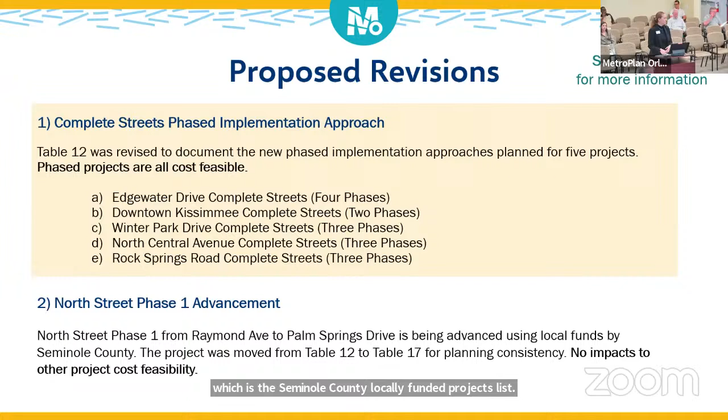Then item 3 is a little bit of touting for City of Orlando. They did receive a Safe Streets and Roads for All federal discretionary grant not too long ago. So we are incorporating that into our MTP by reference, and that's what you'll see on Table 13, which is our bicycle and pedestrian needs list. With this addition, there are no impacts to any project cost feasibility because that is a separate funding source.

Item 4 is the addition of the Headwaters Trail from south of Nova Road to State Road 528. This is a request from Osceola County staff to add this project to Table 13, our bicycle and pedestrian needs list, at the very bottom of the list as an unfunded need, because they are pursuing some other potential funding sources to be able to move forward with that trail. They were looking for planning consistency to be able to unlock the opportunities for those other funding sources. So while that's being added to our list as an unfunded need in the 2045 MTP, that means there are no impacts to other project cost feasibility.

Item 5: earlier this year, we made some revisions to some of our bicycle and pedestrian projects to specifically call out their potential eligibility for SUNTrail program funds. We're adding that description to one other trail we missed in those prior edits, the St. Andrews Trail project in the city of Winter Park. We're just changing that description to say it's potentially eligible for SUNTrail program funding. With that minor administrative change, there are no impacts to project cost feasibility.

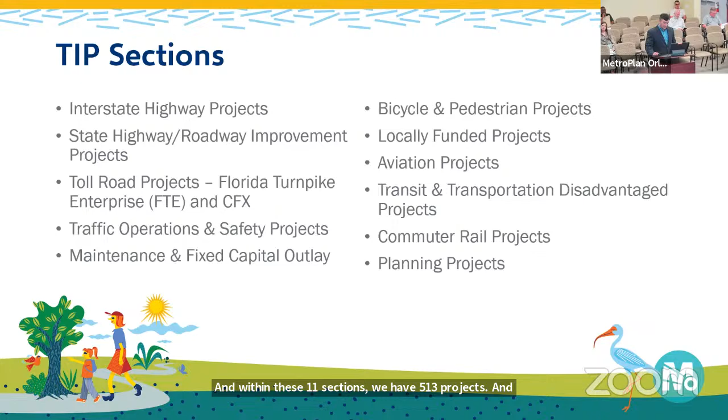I'll start with the National Highway System. This section of the TIP includes projects on the Interstate Highway System, Strategic Intermodal System, and National Highway Freight Network. For our region, most of these projects are on I-4. Within the TIP, we have 19 projects with $1.9 billion in funding, and a few we'd like to highlight.

First, we have one of the Moving Florida Forward projects that will add additional lanes in Osceola County from west of State Road 532 to east of County Road 522. Next, in Orange County, we have a project adding lanes from east of State Road 522 to west of State Road 528.

Also in Orange County, we have an interchange improvement project, that's at Daryl Carter and I-4. And finally, in Seminole County, we have a project adding lanes on I-4 from 1 mile east of State Road 434 to east of US 17-92.

Next, we have the State Highway System of the TIP. This includes capacity improvements, complete streets, safety operations, and ITS investments on the State Highway System. Within the TIP, we have 68 projects with $844 million in funding.

A few projects we'd like to highlight: in the eastern part of Orange County, a project that will add lanes and rehab the pavement on State Road 50 from Chuluota Road to State Road 520. We also have, in the Kissimmee area, an intersection improvement project at John Young Parkway and Pleasant Hill Road.

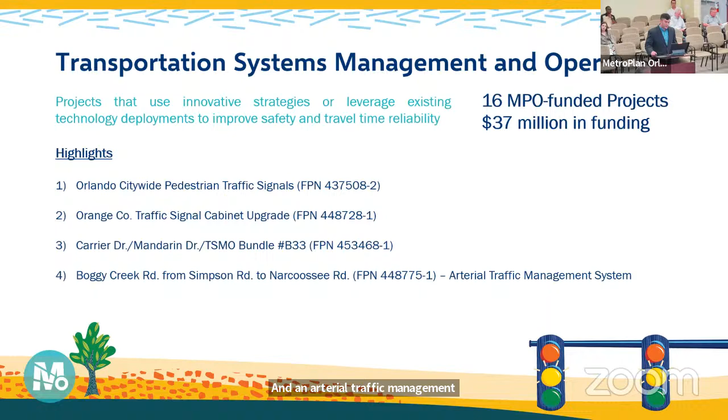Next, we have the bicycle and pedestrian section of the TIP. This includes standalone bicycle and pedestrian improvement projects, including sidewalks and trails. Within the TIP, we have 25 MPO or Metro Plan Orlando funded projects, with $52 million in funding.

In Pine Hills, we have the Pine Hills Trail Phase 2 from Bonnie Brae Circle to Clarcona Ocoee Road. In the Baldwin Park, East Orlando, East Orange County section, we have the Little Econ Trail Phase 3 from Baldwin Park Street to Richard Crotty Parkway.

And then we have several Shingle Creek trails. In Orange County, the Kirkman Trail section from Old Winter Garden Road to Raleigh Street. In Kissimmee, Phase 2B, the Yates Connector. Also in Kissimmee, the County Line Connector, Phase 2C. And finally, in Orange County, Phase 4, from Alhambra Drive to Old Winter Garden Road.

Safe Routes to School. This includes sidewalk projects within close proximity of schools. Within the TIP, we have 3 projects with $1.1 million in funding.

These 3 projects are the Deerwood Elementary Phase 2 sidewalk gaps in Kissimmee; Phase 1 of the Hickory Tree Elementary School sidewalks in St. Cloud; and Phase 2 of the Boggy Creek Elementary and Parkway Middle School sidewalk gaps, also in Kissimmee.

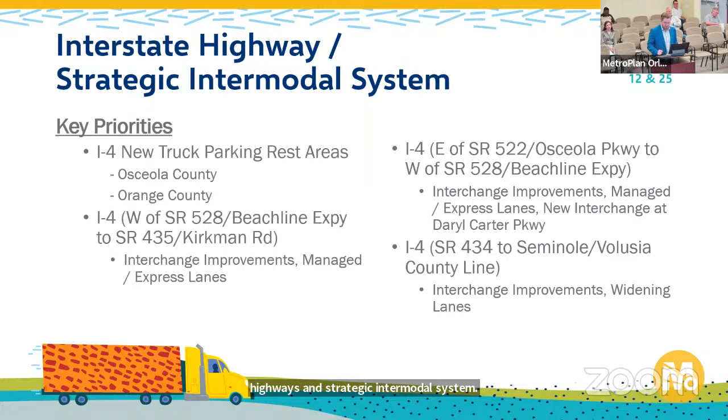Here is a list of the funding programs within the PPL. Each of these has a prioritized project list for that category, as well as an informational one-sheet within the document explaining the ins and outs of those programs. I'll give a brief overview starting now. First, the Interstate Highways and Strategic Intermodal System—the one-sheet for this program is on page 12 and the full list on page 25.

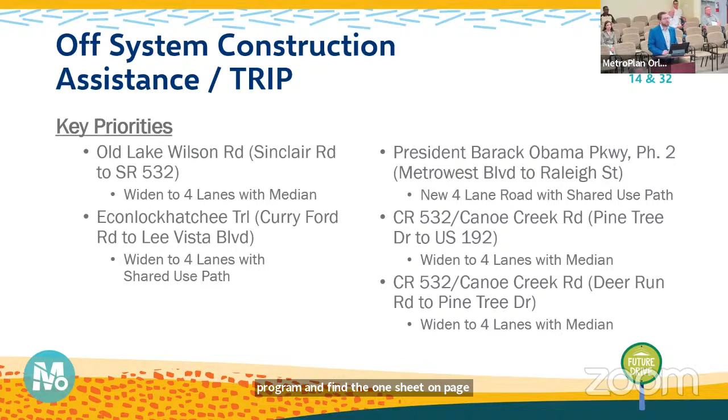Next, we have the State Roads and State Highway System—one-sheet on page 13, full list on page 26. Next, our Off-System Construction Assistance Program—one-sheet on page 14, full list on page 32. Next, our Complete Streets Program—information on page 15, full list on page 33.

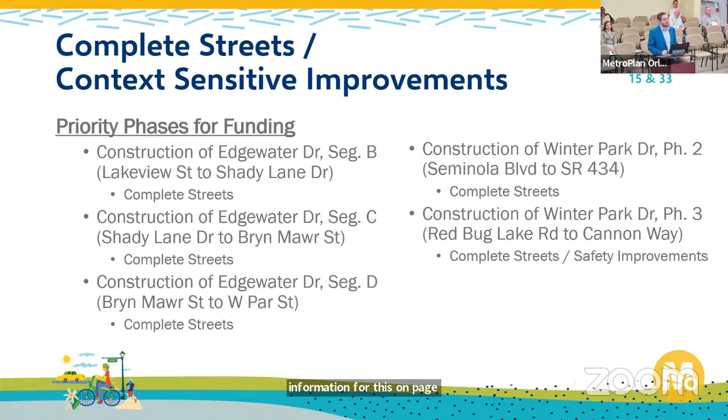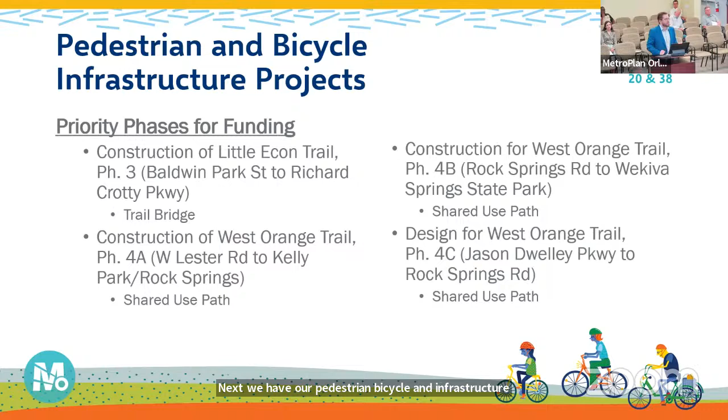Next, we have TSMO, which I'm pretty sure you're all fairly familiar with—more information on page 17, full list on page 35. Next, our pedestrian, bicycle, and infrastructure projects—information on page 20, full list on page 38. Safe Routes to School—more on page 21, full list on page 40. Our critical sidewalk gap bundles are on page 22, with the full list of broken out bundles on page 41. And our regional transit projects, to round out the lists, are on page 23 with the full list on page 50.

I know I kind of raced through all of those—that was kind of my intention, hoping you guys can go in and take a look, a quick breeze through. Hopefully you didn't have a chance to read all the information on those slides, so you can take a look at the plan itself and give us some good feedback. I know Dr. Brock has already given us some good information during Taylor's presentation, so we've got an edit in already.

If you could, please get that feedback into us by June 7th. As you're reading the document, think: is this a priority phase that we are prepared to undertake? Is this consistent with our commission's, our city council's priorities still? Have all of the departments that would be affected weighed in on the project?

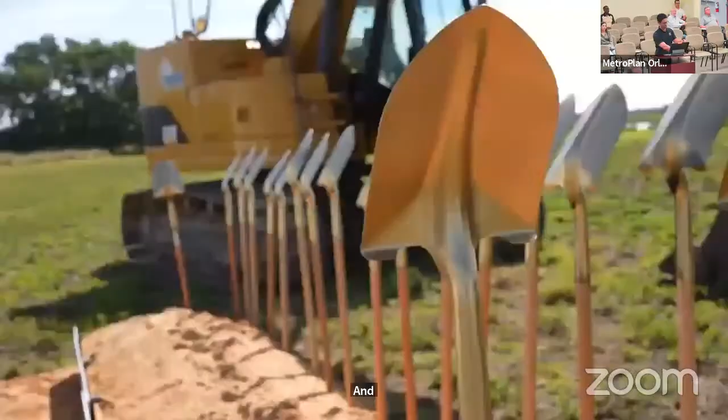It's an amazing day anytime we can create a new corridor in Central Florida, and 516 is going to serve as a vital connection between Lake and Orange County. I really am hopeful that this roadway will set a standard for us to look and think outside the box of how we can incorporate a sense of place.

Success for the Florida Wildlife Corridor movement depends on these diverse partnerships, from agencies like CFX and county planners and developers and NGOs and passionate individuals like yourselves. If we're going to chart a path for Florida that we can be proud of for our future, we have to do these kinds of collaborations. This new road is a pioneering example of how roads can be planned and designed sustainably with less impact on our ecosystems and with more applications of transportation technology.

So imagine never having to worry about where and when to charge your EV, which is what most of us do today if we own them, but instead just driving down the road that recharges as your vehicle moves. Yeah, we're gonna learn so many things.

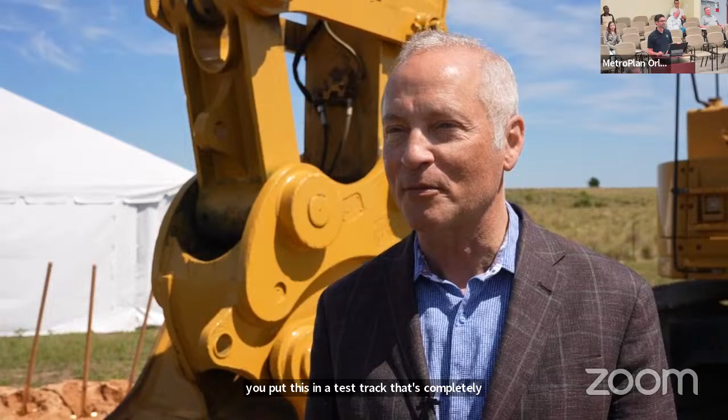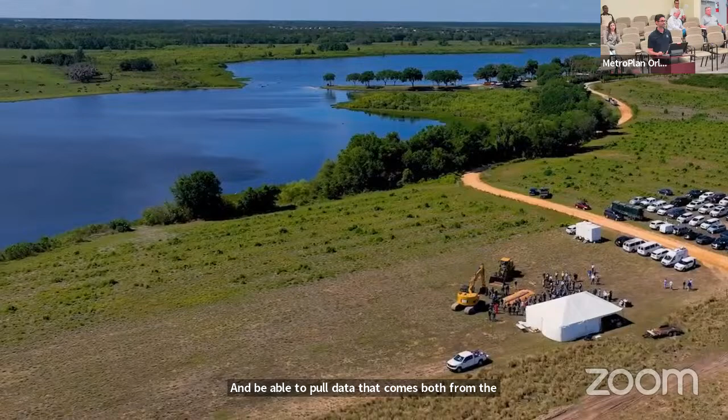As you know, when you put this in a test track, it's completely different to when you get it out in the real world. So we're gonna learn things like feedback from the drivers. We're gonna learn about the excitement that people have about the fact that this is not just a science experiment, that it's a real world deployment and that it actually works. And be able to pull data that comes both from the roadway and the cloud and show everybody that this is actually a sustainable, scalable solution.

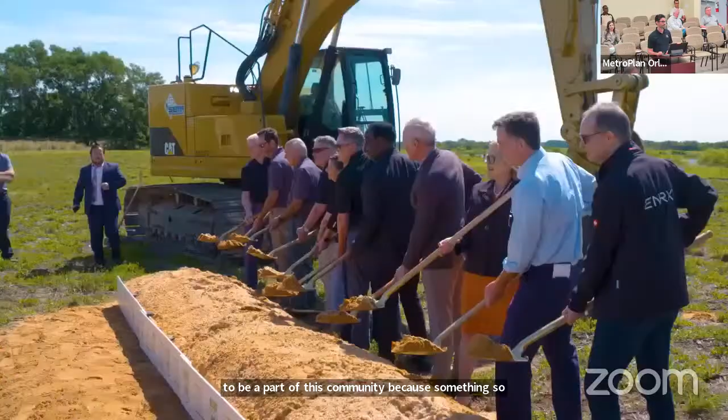You know what I'm excited about is the protection of the wildlife corridor. I'm also very excited about this new technology. And it's just, I'm proud. I'm proud to be a part of this community because something so innovative, so cutting edge is starting right here in Central Florida, and I think we're thinking forward, we're thinking about the next generation.

So now you didn't see me in the video, but I promise you I was there. A lot of excitement and positive energy around the project.

So jumping into the project details, State Route 516 is an east-west connection between State Route 429 in Orange County and US 27 in Lake County. It's a project that's been studied for over 20 years now. The Lake Orange Expressway is a new 5-mile limited access expressway, and it was designed in 3 segments, 2 of those in Lake County, 1 in Orange County.

Segment 1 extends from US 27 to Cook Road, and that was designed by HDR. Segment 2 extends from Cook Road to the Orange County line, and is being designed by BCC Engineering. And segment 3 continues east from the county line to State Road 429 and is being designed by DRMP.

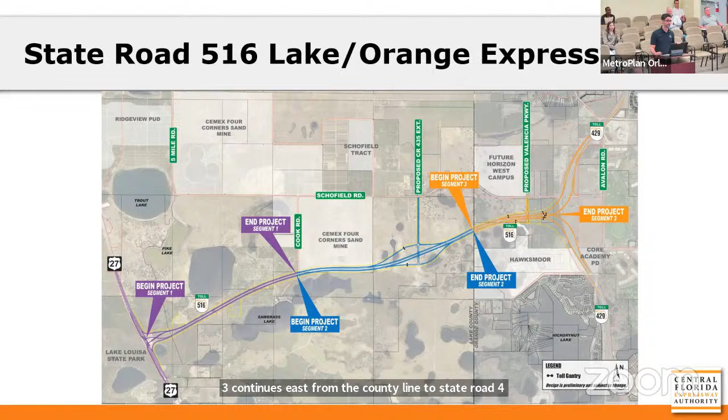In the spirit of the Wellness Way area plan, our board member, Commissioner Sean Parks, challenged the staff to think big and incorporate sustainability elements during the design phase of the State Route 516 project. Really, to meet that challenge, as you can see here, we've incorporated a number of key elements.

First, we've coordinated extensively with the Florida Wildlife Corridor Foundation, FDOT, and Lake Louisa State Park to site a wildlife crossing under US 27. The proposed crossing will open a critical connection through the constrained area of the Florida Wildlife Corridor, northwesterly toward the Green Swamp and the Ocala National Forest.

The project also includes the installation of solar arrays throughout the corridor with the intent of offsetting 100% of our power consumption from our lighting, our toll systems, and our ITS systems that we're going to be deploying on the 516 corridor.

We're also partnering with Lake County to include a co-located public trail, which extends approximately 3 miles from US 27 to County Road 455. And then following construction, we're going to be landscaping the trail and roadway, which will include drought tolerant native plantings with a heavy focus on pollinators.

And as a part of the overall project, we are pursuing a platinum level Envision certification. So to achieve a certification from the Envision is similar to achieving a platinum level LEED certification on a building project.

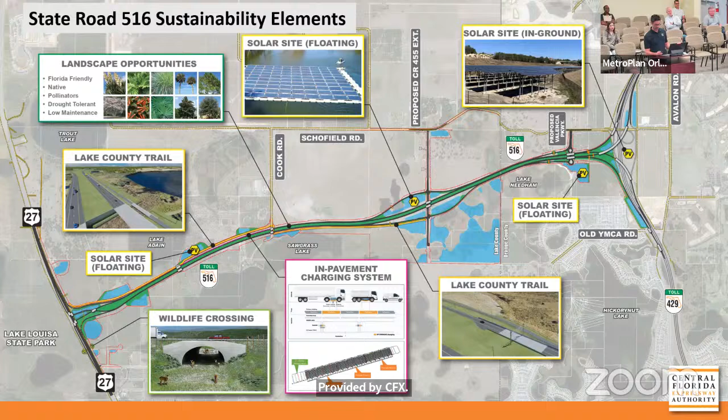All right, so here we are. Let's jump into the dynamic wireless charging. The next few slides will focus on this technology and this section of roadway, which is segment 1. It's going to be approximately a 1/2 mile to 3/4 mile section of road, one lane in the westbound direction, starting around Cook Road.

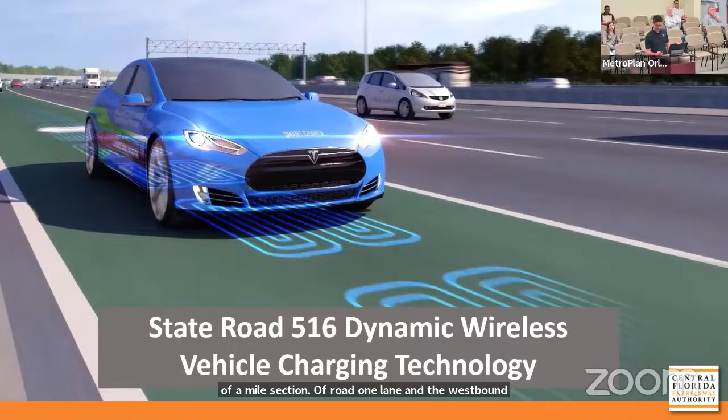The pilot team's key partner for the initiative is Aspire, a National Science Foundation Engineering Research Center. Aspire stands for Advancing Sustainability Through Powered Infrastructure for Roadway Electrification. Aspire has set a goal to progress the field of sustainable and electrified transportation in all its forms to the point where people everywhere can benefit from transportation innovations without ever having to think about where or how their charging is happening. Aspire has 400 collaborators from 10 partner universities and dozens of disciplines. They integrate academia, scientific research, and real-world applications, working in sync with over 60 industry, government, and nonprofit members across all sections of the electric transportation ecosystem.

We've also engaged with ENRX as a technology provider for the wireless charging system. ENRX is a global green tech company based in Norway, and they're going to deliver that technology solution on our roads. They have active projects in both Belgium and Germany using wireless charging technologies.

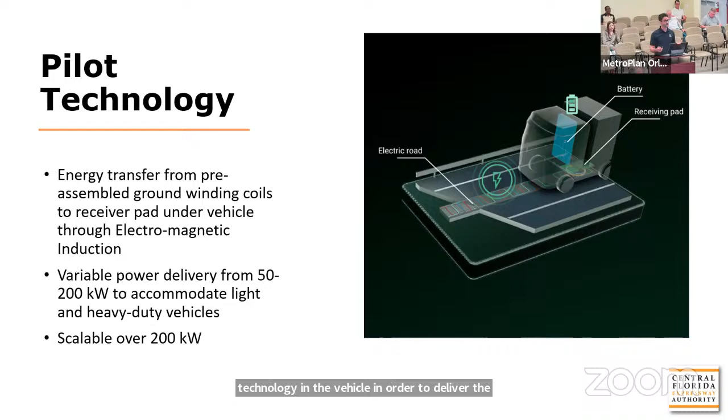Jumping into the technology employed for the roadway, we're actually going to be using the laws of electromagnetic induction for this application. A current is sent through coils located in the pavement, which creates an electromagnetic field. A receiving pad is required on the vehicle in order to generate charge to the electric vehicle. The system is dynamic in nature, and will create the appropriate level of charge for the size vehicle. Smaller vehicles can receive a 50 kilowatt charge, and larger truck traffic can receive a 200 kilowatt charge. The technology in the roadway will communicate with the technology in the vehicle in order to deliver the charge at highway speeds, which is a key component of the project.

The CFX design team has been working with engineers and scientists at NREX and Aspire for the past year and a half to identify and develop the construction means for incorporating the charging system into the constructed roadway. In September, CFX hosted a team of international engineers and scientists at our headquarters building to review the first prototype of the precast concrete panels that will ultimately house the technical components of the wireless charging system within the roadway. Team members attended from as far as Germany and Poland to review the concrete precast panel prototype.

So why is this test important? Literally and figuratively, we're laying the groundwork for this new innovative technology, and standardization is a key and important part. International standards must be developed to inform utility providers and auto manufacturers on how to move forward with technology decisions in their respective businesses. Pilot studies such as ours are critical to developing such standards, and if successful, will ultimately lead to the widespread implementation of in-road dynamic wireless charging.

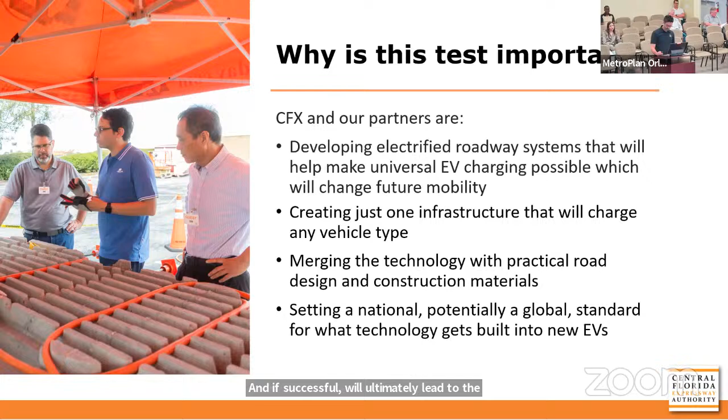Taking a step back, looking at the concrete form, it was important to establish that the precast panel could be fabricated locally using conventional construction methods and materials while retaining the detail and tolerances established in the design. NREX shipped samples of their technology elements to be placed in the panels ahead of the meeting at CFX. When the team convened in September, we had 2 sections of the precast concrete panel prototypes on site. Each panel is 11 feet long, 3.5 feet wide, and weighed more than 5,000 pounds. The technology elements shipped from Poland were laid out and installed within the panels to check the constructability and the fit, and everything fit better than expected. The test went very well back in September.

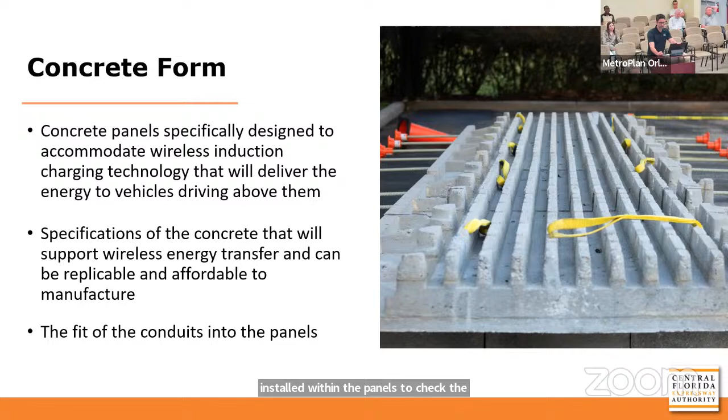And that's all I have, but happy to answer any questions. Excellent presentation, we'll go ahead with questions. Charlie.

So just curious, you said the charging lane is like a half mile to 3/4 of a mile? That's right. So is there an estimate, like a full charge for a vehicle or partial? Yeah, so there is an idea. In general, what we're targeting is that the charge should be able to get the vehicle through that corridor without losing any battery power, and then give it enough to basically double that length. So it's not intended that once you go over the location, you're fully charged.

This is more of a prototype application, really for setting the standards for future use. For this type of technology to be helpful and useful, it needs to be implemented in longer segments and sections of roadway. There's a test track out in Utah where they have actual buses with the charging capability, and they can run perpetually around those tracks. But again, there's a good segment of that track that has the charging infrastructure. That gives an idea.